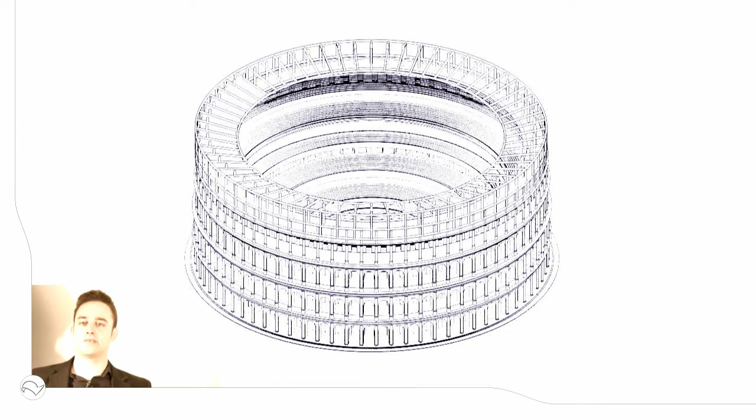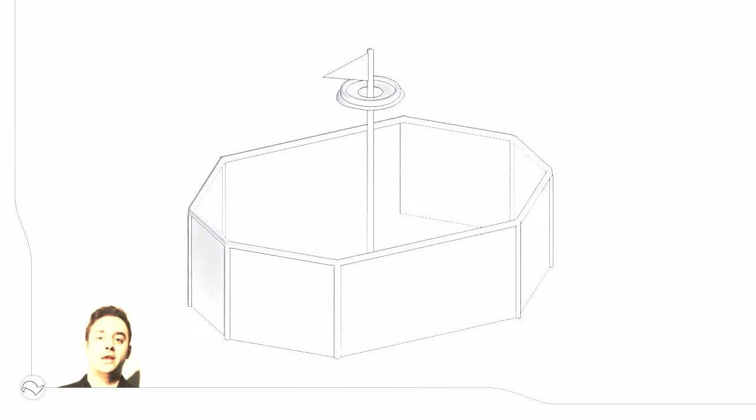Royal tents became fashionable in Western Europe, growing larger and ever more ornate. These tents, due to their material ephemerality, developed a much more architectural quality than their predecessors, as a symbol of luxury and frivolity. Walter Bird established Bird Air for the sale of the radome, an inflated spherical device for climate protection of radar dishes.

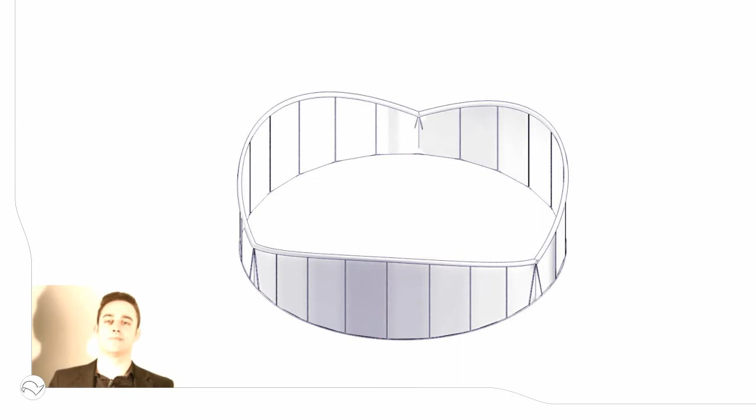Architect Bertel Olaf Zenitz created a triple arc cable net structure with arc tangencies at endpoints forming 90 degrees. From the roof, the plan forms a circular profile and fabric spans the edge condition of rigid arcs. The original hyperbolic paraboloid-shaped stage cover was by pioneer engineer Frei Otto, who developed the canopy for the Music Pavilion in Kassel, Germany.

Fabric structure industries came to develop more reliable fabrics and employ advanced structural design techniques. In this example, Kurt Warner at WSSL designed and developed the arabesque stage cover, with brothers Gary and Rolf Warner before establishing separate companies. Today, advanced computational techniques have supplanted the former manual process of fabric structure design and have aided in the service and delivery of membrane architecture.

Pre-stress is the introduction of internal stresses into a structural member to counteract the stresses resulting from the applied load. To demonstrate, pre-stressed cross cables both act in tension during the application of shear stress, as opposed to tension and compression when loose. Arches and domes are the forms most capable of spanning larger distances more efficiently, as their funicular form most evenly distributes the load towards the ground.

Membrane structures are activated in tension either pneumatically by inflating fabric and creating a synclastic form, or by creating an anticlastic form, with opposite Gaussian curvatures acting in perpendicular directions, known as hog and sag. What is created is a minimal surface which most efficiently transfers load while minimizing material use.

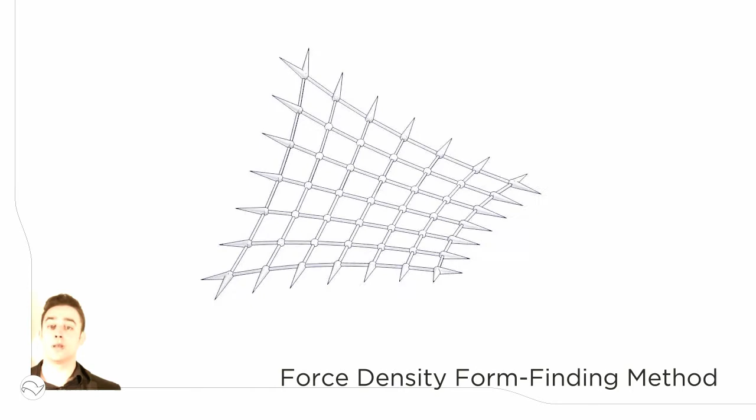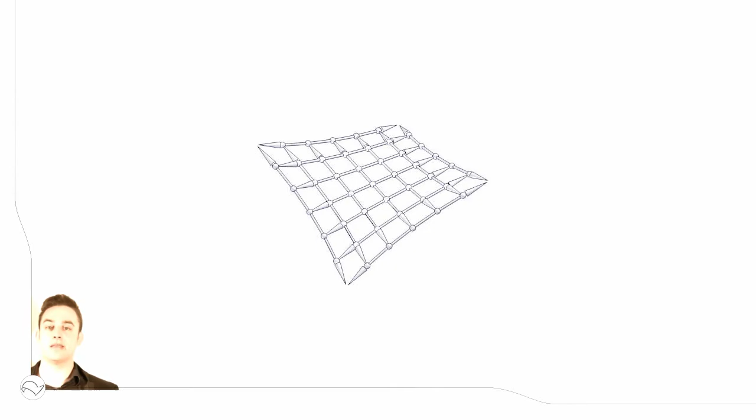The dominant algorithm for determining minimal surface is the force density form finding method. When employed, it can quickly generate replicable results and structures of high quality and flexible adaptation. External forces balance with internal forces at an equilibrium state around a pin-jointed network. In order to turn a non-linear set of equations into a linear one, the force density ratio is fixed. This creates the opportunity to perform the static analysis of geometrically non-linear structures by using Hooke's law.

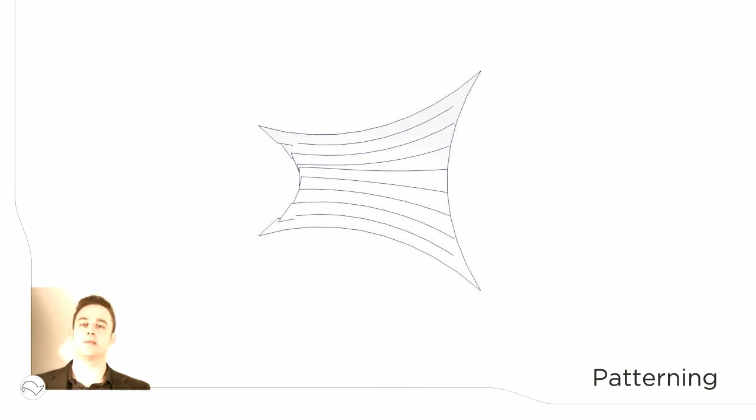Double curvature in fabric can only be approximated by joining two-dimensional cutout equivalents of their 3D counterparts, known as patterns, by being careful of the width of a given roll of fabric. Other edges can be extended and chamfered to create overlapping seams, and fit cables or ropes in order to form keders. Keders and cable edges can be used to connect to structural members by extruded luff tracks or rope clamps.

Most fabric, with the exception of foils, have different material properties when measured on separate axes, known as anisotropy. The direction dependence of fabric orientation is based on both the weaving and coating process. The strong lengthwise direction within a weave is referred to as the warp, and the secondary direction is known as the weft, or fill fiber.

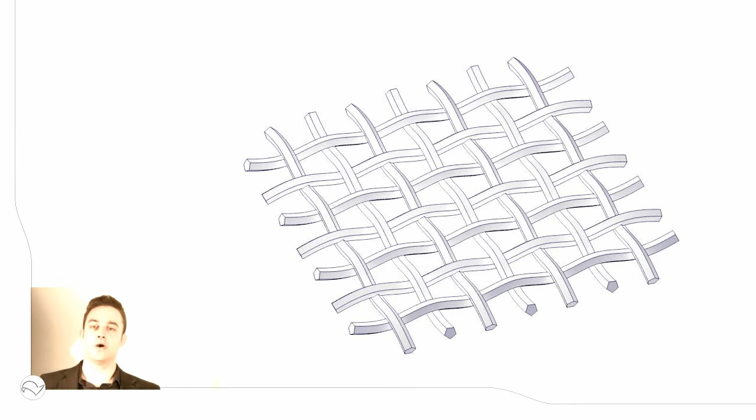Warp threads differ as they are subject to higher tension on a frame or loom. Weft jump occurs during the heating process, as warp threads are kept under tension while weft threads contract and are thus softer with lower moduli.

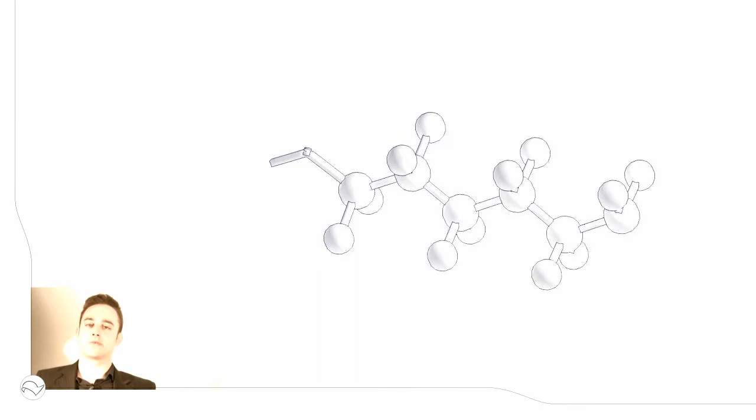PTFE exhibits a strong resistance to common industrial and traffic pollutants. The carbon-fluorine bond is one of the strongest in organic chemistry. The low polarity of the fluorine envelope in PTFE chains leads to an anti-adhesive behavior with a very low surface energy.

Central staging, or concert in the round, is any space whereby the stage area is surrounded by the audience. Standard staging is a typical format with a limited angle for audience viewing. After applying the Jacobs method, a calculation used to determine a rough estimate of crowd population in a given area, it was determined that central staging can accommodate up to 3 times more people with improved viewing conditions of the stage.

This is due to a tendency for the densest crowding closest to the center of attention. In other words, central staging means that more people can be at the front of the action.

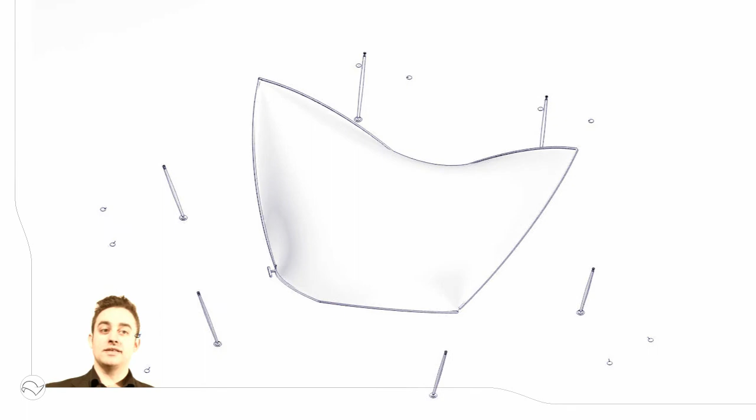From the 2 hinged arches of the aforementioned arabesque stage cover comes a possibility to split and rotate the arches to add a third, modifying details accordingly. Due to a greater risk of ponding from the minimal surface created by the triplicated arch edge condition, 3 ridge cables must connect from the kink in the arch to a central ring to be protected by pockets. To enhance sight lines and usable space beyond the cover, canted masts transfer cable loads to triangulated cable tiebacks.

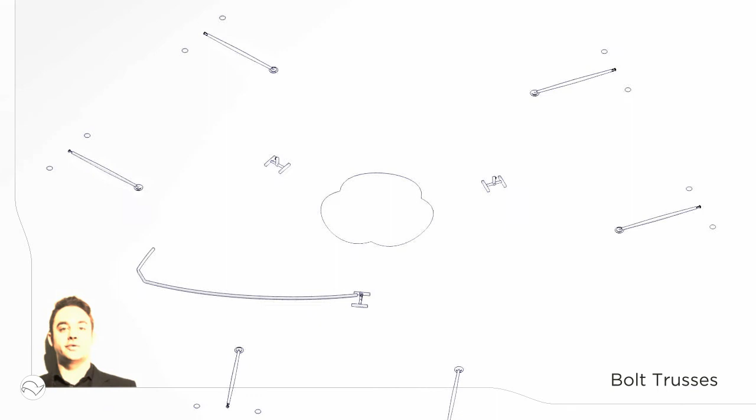Installation is a crucial part in the consideration of membrane structure design. Here, we will illustrate the installation for the Tripar 25. Fabric, baseplates for cables and masts, are first laid out in their respective locations. Arches are bolted together on the ground, with one having the apex crossing the center. Fabric is then unfolded and attached to the outermost edges of the arches by an adjustable carabiner clip system.

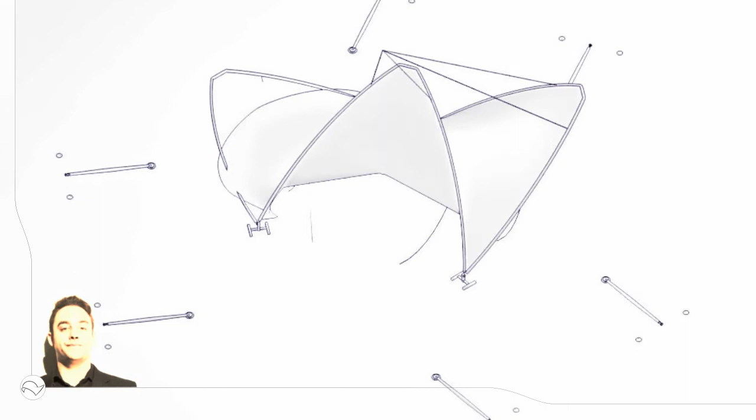Next, 4 cables are attached to each arch, and 2 of the arches are lifted with a mechanical boom until both arches reach roughly 90 degrees to allow for the attachment of the fabric of the last arch. Masts are then lifted and connected with the cables along the arch perimeter. Finally, the canopy is leveled on all 3 sides to create a 45-degree cant.

Wind and snow load are calculated separately using ASCE design codes and NBC requirements. The final values enter the finite element analysis software, whereby warp and weft stress plots help to determine whether the fabric can handle the loading under various wind conditions. These include maximum uplift or downforce at both 0 and 60 degrees to the canopy.

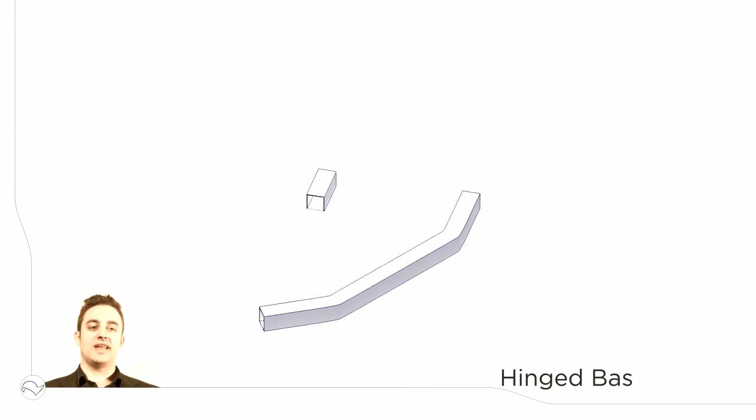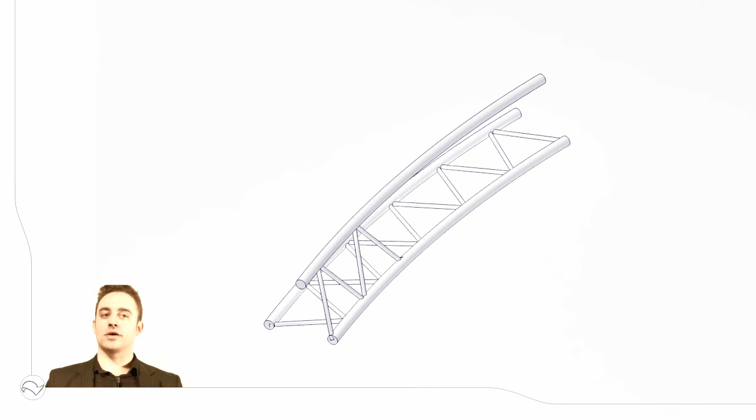An HSS framed baseplate supports hinge axes, horizontally oriented at 60 degrees to one another, about which triangular trusses may connect and pivot from the top edge of the hinge plate. Circular section pipe is curved before identical struts, pressed at both ends, are welded in a Warren fashion, connecting 3 identical arcs which comprise the chords of the triangular truss. Conical adapters with R-clips fasten at male-female joints to connect each modular part.

A mast hinges on a ball and socket joint connected to an anchored baseplate, transferring loads from the arch trusses to the cabled baseplates on the ground. Since tangential forces are complex and unpredictable, fabrication would have to meet high tolerances in order to switch this detail to a moment connection. A hinge toggle cable baseplate is anchored by stakes. Cables can be adjusted by using turnbuckles to increase pretension.

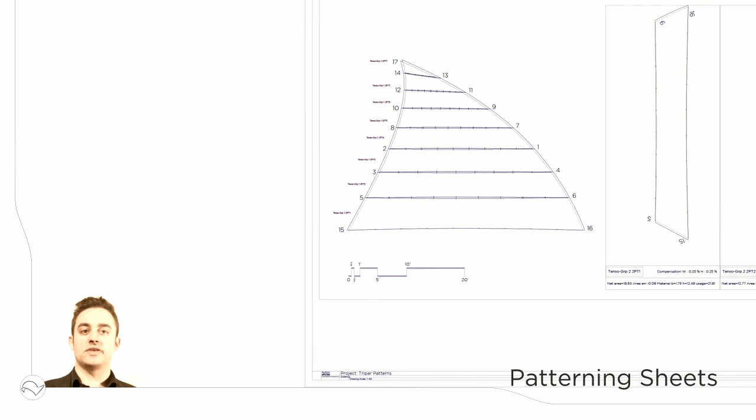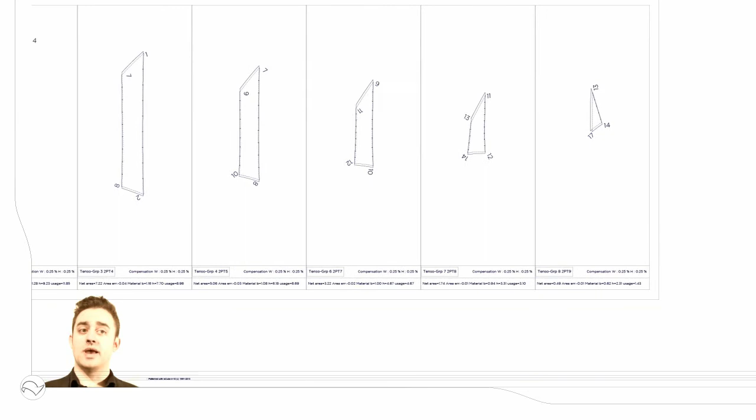In order to economize the use of the fabric, patterns are to be based on a repeatable module, a sextant of the overall top. Radial and linear symmetry enable a single pattern sheet to be duplicated 6 times. Pattern offsets for welding and pockets are added to account for the ridge cables which span from the apex to a central ring. The fabric is scaled by 0.25% as compensation for pre-stress. By this measure, the top arrives on site slightly smaller and is then stretched into its actual size.

Tripar, with its unique and dynamic form, has a multitude of programmatic uses, including concerts, theater performances, weddings, ceremonies, and special events. Its portability and adaptability make it possible to set up almost anywhere and allow for a wide variety of arrayed configurations to expand the covered area.